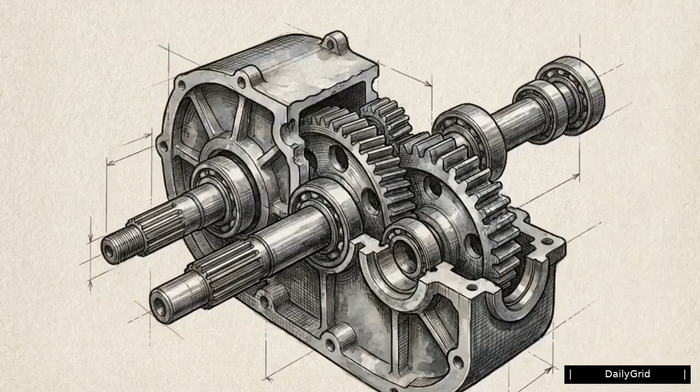The second law of thermodynamics makes a very clear and very grim promise to us all. Everything eventually decays. Because of entropy, every physical system naturally moves from a state of order to disorder, which means every machine, tool, and structure you have ever used is mathematically guaranteed to fail. But there are a few strange exceptions that seem to ignore this rule completely. Objects that survive extreme drops, heavy impacts, and decades of use without a single scratch.

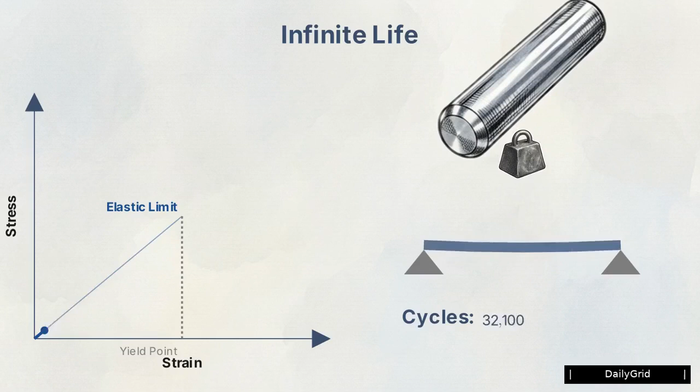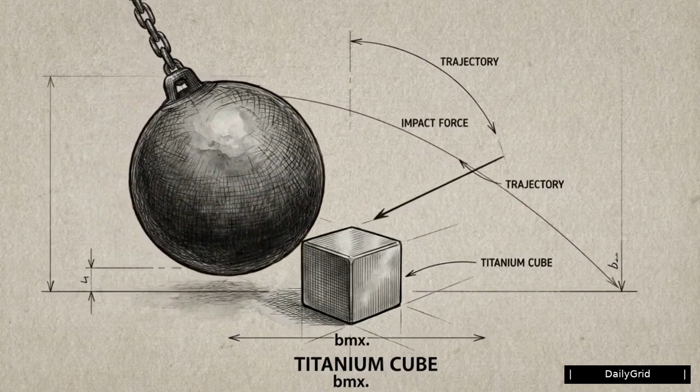Mechanical engineering relies on a concept called infinite life. If you design an object so the stress stays entirely within its elastic limit, it can survive 1,000,000 cycles of use without permanently bending, a mechanical failure known as plastic deformation. These objects aren't breaking reality. Their designers simply found clever ways to use the laws of physics against themselves.

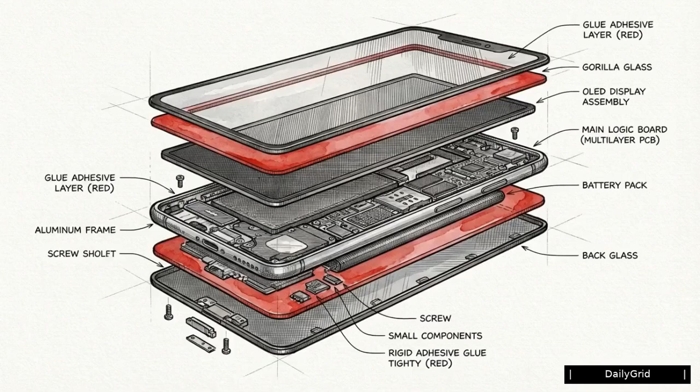When an object hits the hard ground, the kinetic energy from that sudden stop has to go somewhere. Most modern devices use rigid glues to hold everything tightly in place. The problem is, glue traps those kinetic shock waves inside the delicate components, tearing them apart. The Nokia 3310 was built differently.

Instead of being glued shut, its internal components sit on spring connectors. When the phone takes a hard hit, it is designed to intentionally pop apart. This lets the kinetic energy safely escape outward as physical motion, rather than destroying the circuitry. Add in a shock-absorbing double plastic shell and a glass screen safely recessed below the outer lip, and you have a structure perfectly designed to take the hit before the fragile parts ever do.

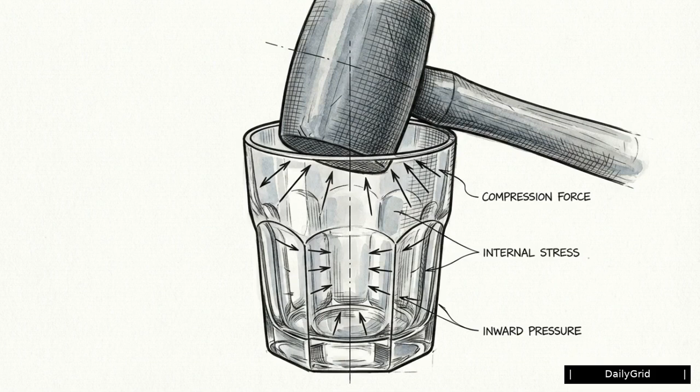Duralex glassware uses a different strategy called thermal tempering. By cooling the outside faster than the inside, engineers lock the glass in a state of permanent internal compression. This microscopic tension allows the glass to absorb massive impacts that would shatter standard drinkware. Both methods solve the same problem: energy management. Indestructible objects survive by finding a place for force to live, either through physical motion or internal compression, rather than letting it shatter the structure.

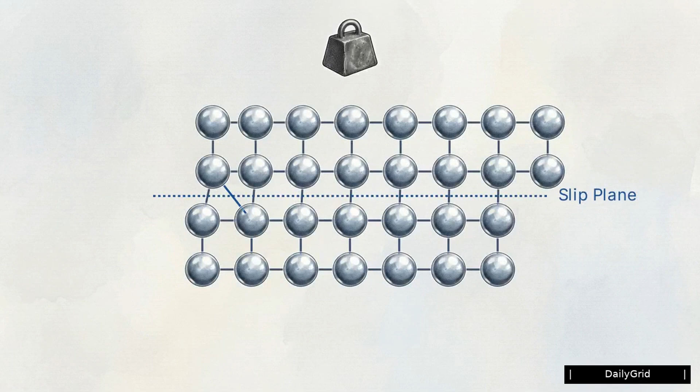If we zoom down to the atomic level, we can see exactly why some materials snap while others bend. Ceramics have highly directional, rigid bonds. When stressed, they shatter. But metals have non-directional bonds, meaning their atoms can slide past one another. This happens through a mechanism called dislocation motion. When continuous stress is applied, a fault line in the atomic lattice smoothly shifts over by a single position along a slip plane.

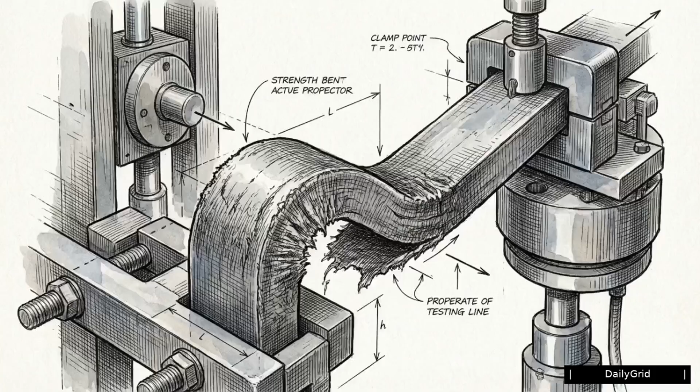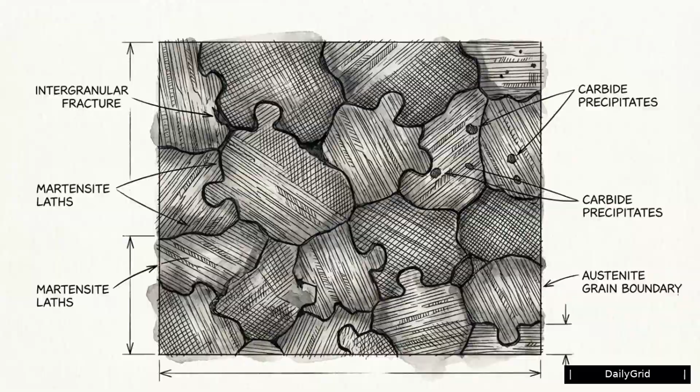The grid deforms, but the overall structure stays intact. But this atomic flexibility has a limit. When liquid metal is poured into a mold to cast it, it cools into microscopic crystalline grains that point in random, chaotic directions. But under immense pressure, those random intersections become critical weak points.

To fix this, engineers forge the metal. By crushing the solid material under immense physical pressure, they force the microscopic grain flow to align perfectly with the anticipated direction of stress. Forging transforms metal from a collection of random grains into a series of deliberate, load-bearing pathways.

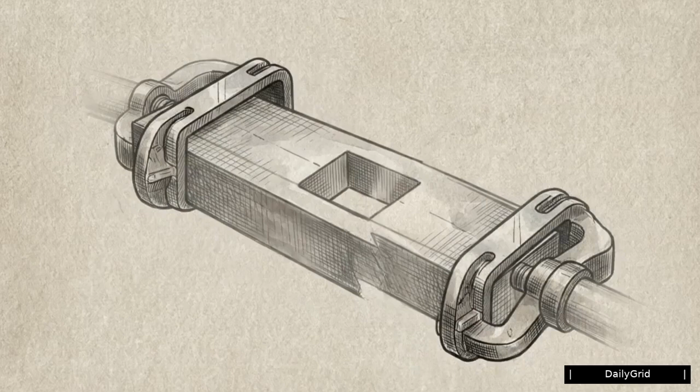But even perfectly forged, completely atomically aligned metal will tear apart if its macroscopic shape is poorly designed. Engineers measure this using the stress concentration factor. It's a mathematical ratio proving that sudden geometric changes, like a drilled hole or an abrupt corner, exponentially amplify the physical stress in that specific spot.

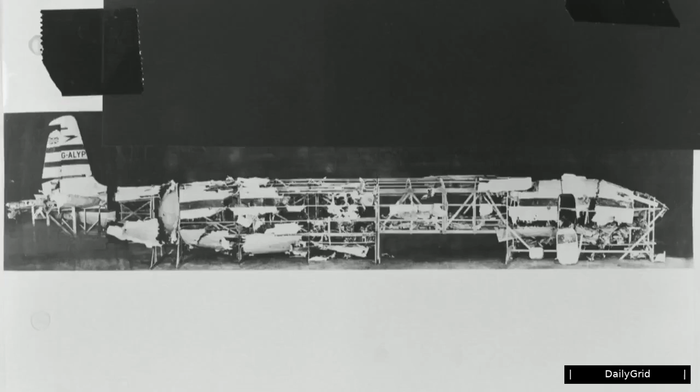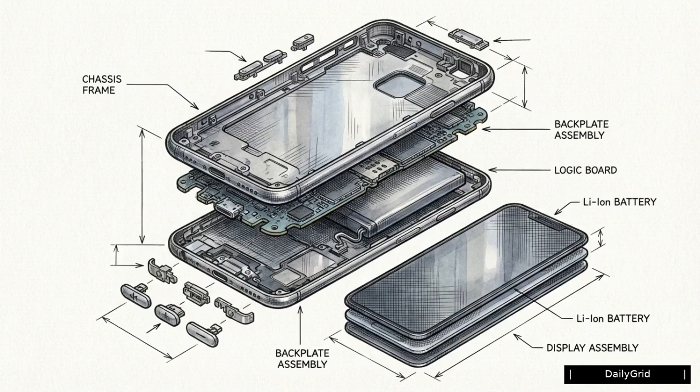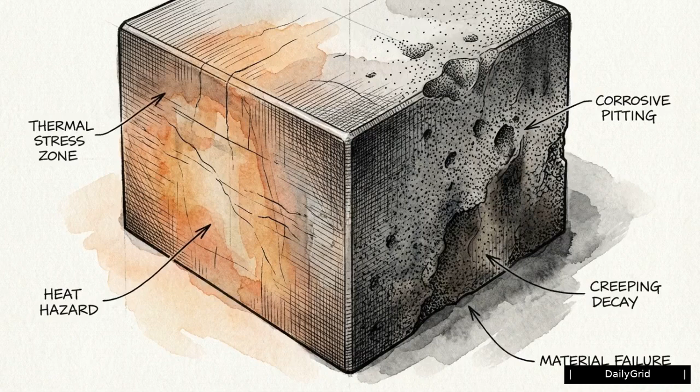If an object can survive physical impact, atomic stress, and geometric fatigue, it still has to face the slow destruction caused by heat and time. Stanley thermoses defeat thermal entropy using a vacuum. By completely removing the air between their double steel walls, they eliminate the physical medium required for convective heat transfer, trapping the temperature inside.

Cast iron skillets actually use heat and time to their advantage. When you bake cooking oils into the iron, the process of polymerization occurs. The oil molecules bond, flatten, and harden into a smooth, rust-proof shield that constantly heals itself every time you cook.

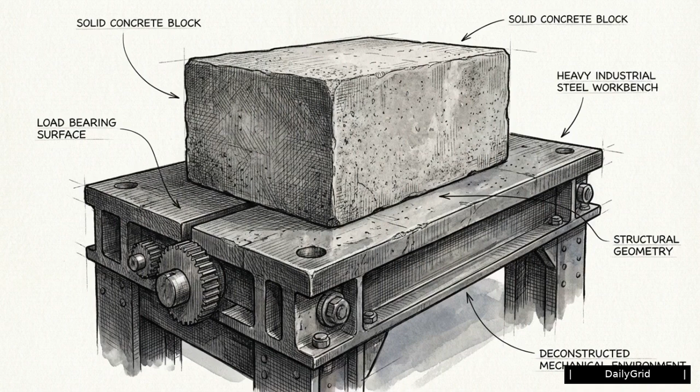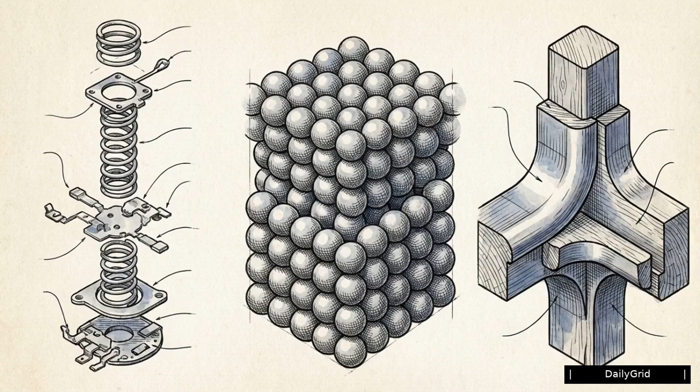The common instinct is to assume that making an object indestructible means making it completely hard, stiff, and rigid. But stiffness is exactly what causes materials to crack under pressure. The common thread across all these designs, from atomic slip planes to spring-loaded casings, is a refusal to resist force through sheer stiffness. Resilience depends on moving in harmony with physical forces.

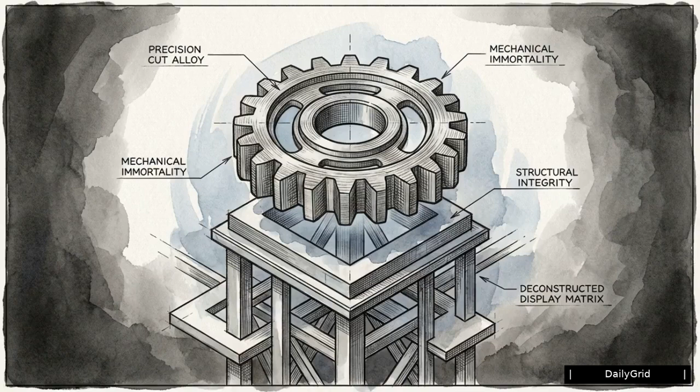The universe guarantees that all things will eventually return to dust, but with brilliant engineering, we can push that expiration date so far into the future that, at least for a human lifespan, these objects are effectively immortal.